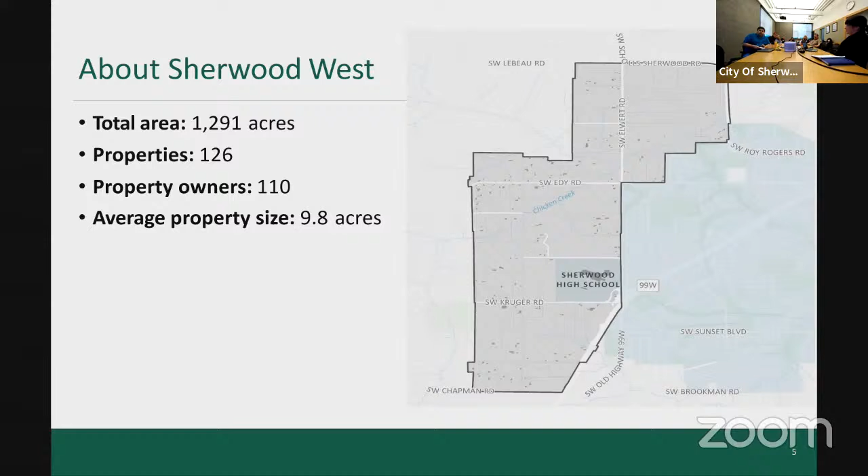So where we are at in the process: we received a grant in 2021 to do this work from Metro. We formed a Technical Advisory Committee and a Community Advisory Committee, made up of folks from within the Sherwood city boundary and also folks in Sherwood West. We just had our 8th meeting and we're headed into our 9th meeting next week. We are developing our land use scenario maps and implementation tools so we can take that out to the community for an engagement activity this summer.

We anticipate this project being wrapped up hopefully by the end of this year, 2022.

So here is the Sherwood West vision. We added some language to the vision that was in the 2016 plan. We really want to make Sherwood West a family-oriented place that's safe, where families can live, work, and play. We want to make sure the infrastructure is planned well, that the streets are well connected, with walkable neighborhoods. We've expanded our tax base here in Sherwood by providing higher wage jobs, and we want to take advantage of our network of natural trails, parks, and open space that Sherwood West provides.

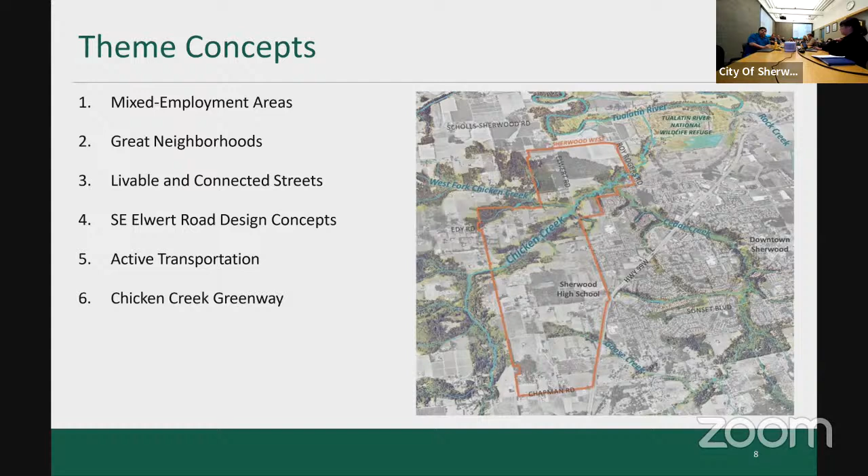So we have 6 theme concepts in this area: mixed employment, great neighborhoods, livable and connected streets. I'll talk about the Southeast Elwert road design concept, active transportation, and my favorite, the Chicken Creek Greenway. But first, let's talk about employment.

We're talking about mixed employment in Sherwood West, and we want the right kind of jobs in the right place. When we started this work, we reached out to over 30+ stakeholders who do work in economic development - folks who build office campuses, folks in the healthcare industry, and those in wine-related businesses around this area, to really get a sense of what would work. Everybody we talked to is really enthusiastic about Sherwood West and the opportunities it could provide for jobs.

And so with that, the employment uses that we're looking at are high tech jobs, clean tech, flex uses, smaller commercial, retail. We want to make sure that we have plenty of different mixes of employment in this area.

This map shows the areas we're looking at for these mixed employment areas. We have the northern area about Scholls-Sherwood Road and Roy Rogers. That area is really flat, with great opportunities for a large campus, park, or multi-tenant space, such as a tech park. Moving down south, we had a little 6-acre node, but our CAC wasn't too keen on that, so we've taken that out of the mix.

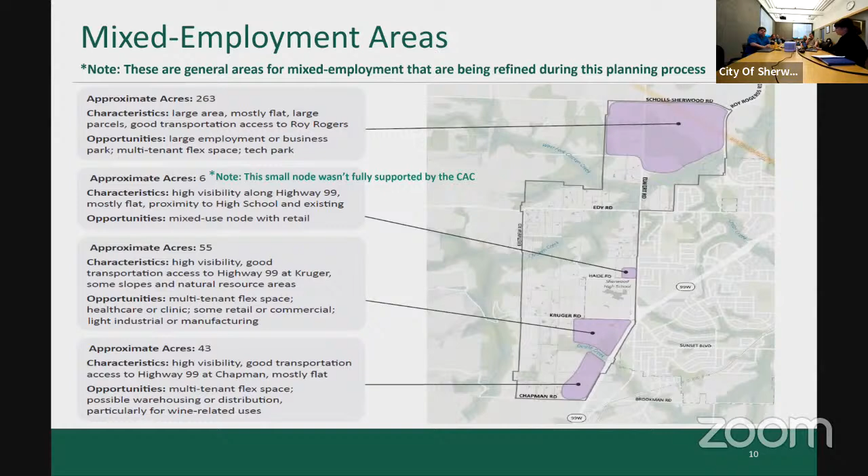So moving on to our great neighborhoods, if you have a great job in Sherwood, you want a great place to live, right? So we plan on making some great neighborhoods. We're planning for walkability. We need to provide for a variety of housing. And of course, we talk about how we need to integrate the new neighborhoods with the existing neighborhoods in Sherwood and what that will look like.

And I'm going to talk about trails here too in a minute. We want to plan for parks in these new neighborhoods and make sure that they're connected to green spaces and nature.

So when we talk about different types of housing in Sherwood West and what we should be providing: single family detached, townhomes, single family detached with ADUs. And we've talked about cottage clusters and different kinds of plexes.

Now going back all the way to the comprehensive plan work that we did a couple years back, we know that the community really desires cottage clusters and townhomes out of that missing middle span of housing. Those are the two that have bubbled up from the community as what they prefer out of those types.

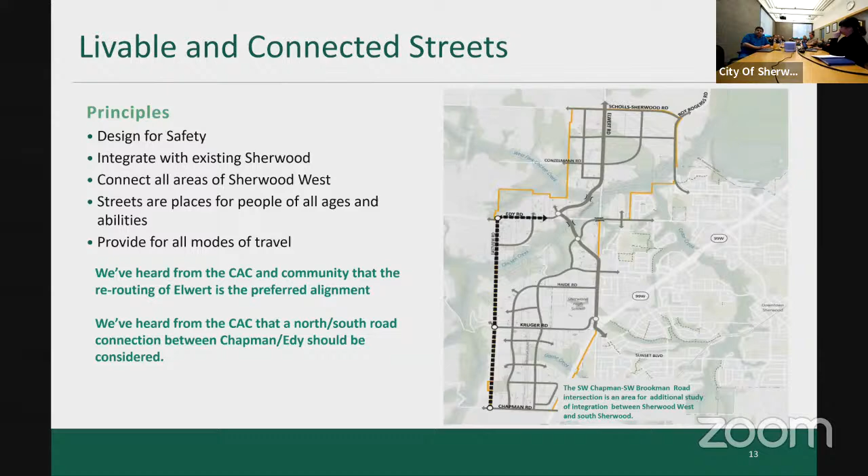The bigger the grid, the better—connections, connections, connections. I lived in a city for a while that was all traffic circles everywhere, and it was such a joy. Didn't get dizzy? No, because when you come down Elwert, sometimes that's backed up. When I used to commute that way, it'd be backed up just because everybody's doing a hard stop at the intersection. Well, even a halfway stop would cause it to back up, even if they're rolling kind of through it. So anyway, I'm all for it.

So our Southeast Elwert Road design concepts. When you think of great streets here in Sherwood, I often hear people say we want Sunset, we like Sunset, we love the design elements on Sunset. So we've taken that approach.

We're looking at how we can take those design elements along Sunset and integrate them, crossing Highway 99 up Elwert. So we are looking at increasing the tree canopy, making sure we have planted medians, a consistent fence line, making sure the multi-use path is extended all the way up Elwert for folks to walk and ride their bicycles, and just making sure it's a nice green landscaped corridor.

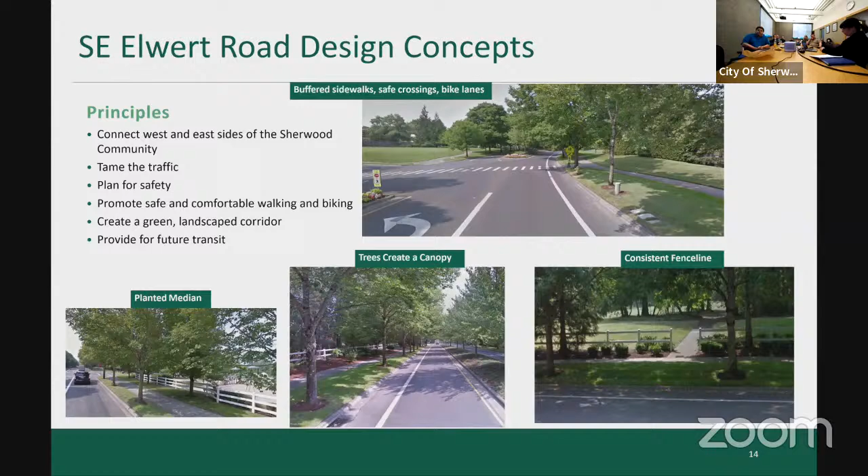So when we talk about Elwert, we want to make sure we're designing it in a way that's distinctive for the road. There will be little nodes along the way. Of course we have the high school, the edge, which is really the gateway. Then we move into kind of the residential boulevard treatment where we extend that multi-use path up along residential neighborhoods.

We have some green crossings over Chicken Creek. We want to make sure those crossings are designed in an environmental manner. Maybe we can provide some artwork and public views for those crossings.

And then in the employment area, like I was saying, we want to make sure we're limiting curb cuts, but making sure trucks have the right turning radiuses. Make sure we have a nice visual corridor along that area too, and make it a nice little employment parkway, as I like to call it.

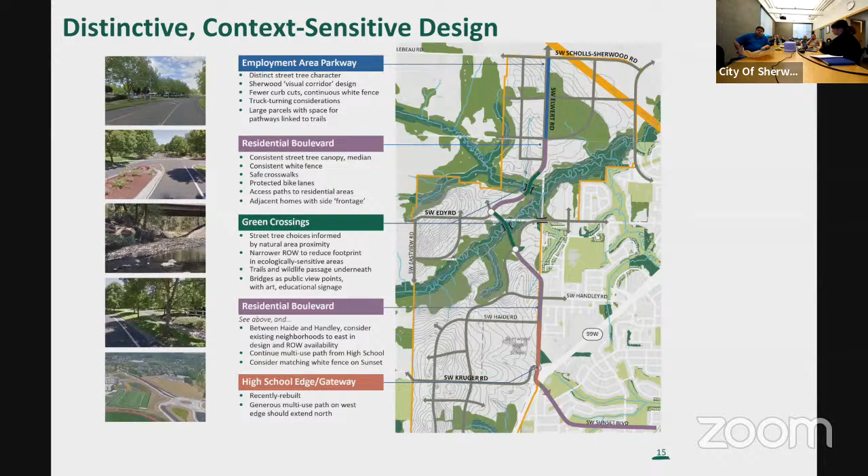So active transportation. Just imagine yourself at the YMCA. You're on your bike, you cross the new pedestrian bridge onto Elwert. I crash.

But it's safe because you're not going to get hit by a car. You cross that new pedestrian bridge, you're at the high school, you're on a new multi-use path. You take that path all the way up to the new Chicken Creek Corridor Trail. You head east on that trail all the way to the refuge. Or you can circle back to the Cedar Creek Trail. So it provides this awesome loop.

And with that, I want to move to Sherwood West. We really want to provide all modes of transportation, making sure we have key connections to really interesting places, your destinations, your schools, your parks, your employment.

Can we jump back real quick? One of the things we talked about that I really liked was, you'll notice in Chicken Creek, trails on both sides, housing on both sides. And on this map, you see all those little green spaces, so those are proposed neighborhood parks as well.

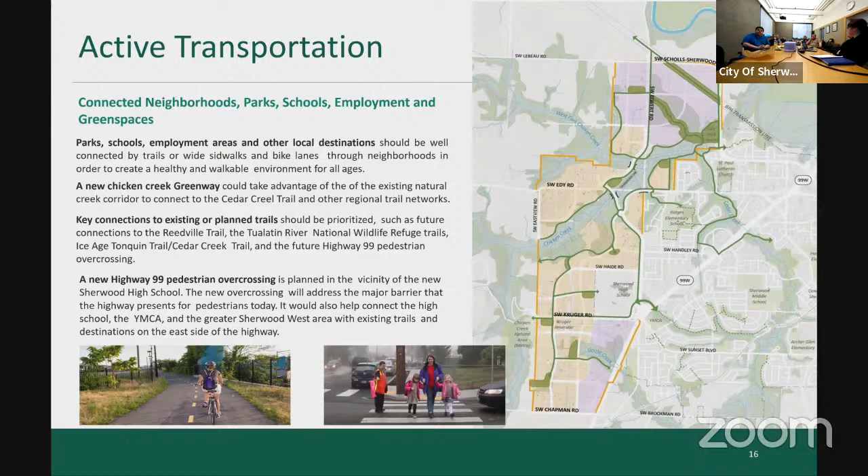So the Chicken Creek Greenway - as you know, Chicken Creek crosses through Sherwood West, and it's a green asset for the community. We're planning a trail system on both sides of the riparian corridor through there that can provide access to nature, stormwater management, multi-use paths, and it could really provide a buffer between neighborhoods.

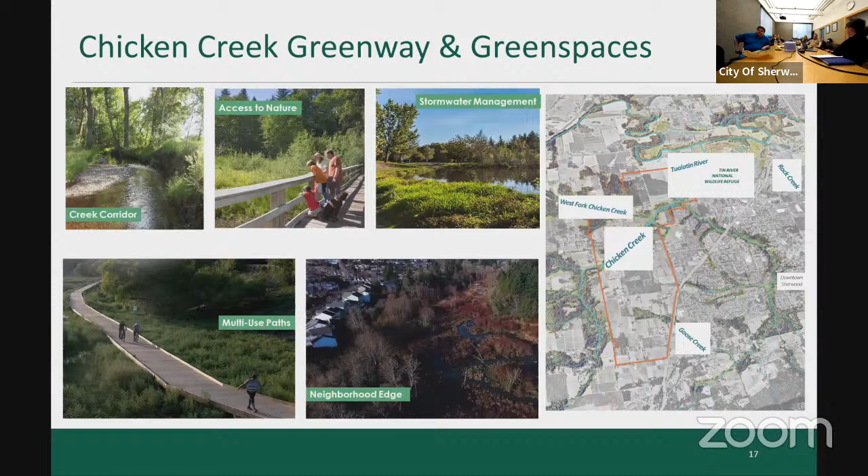I must say, I have never heard of Goose Creek. I'm embarrassed. Yes, we have a Goose Creek. I've been around a couple of years, and I've never heard of Goose Creek. All right, cool. Is there water in Goose Creek, or is it just name only? When I drive by, it looks like blackberry bushes. All right, so it's more of a seasonal thing - goes back underground. Popular with the kids, the blackberries.

So the estimate of total open space in Sherwood West right now, when you take out all of the resource lands - the riparian areas, the wetlands, the steep slopes - when we take out the areas needed for parks, and the natural gas line easement that runs through Sherwood West, we're looking at almost 40% open space.

And then I need to say it would actually be more open space, because as you develop neighborhoods, we have an open space policy that requires even more open space. So it's gonna be a nice green development. Yeah, and that's why it's always been, hey, it's not that much developable dirt out there.

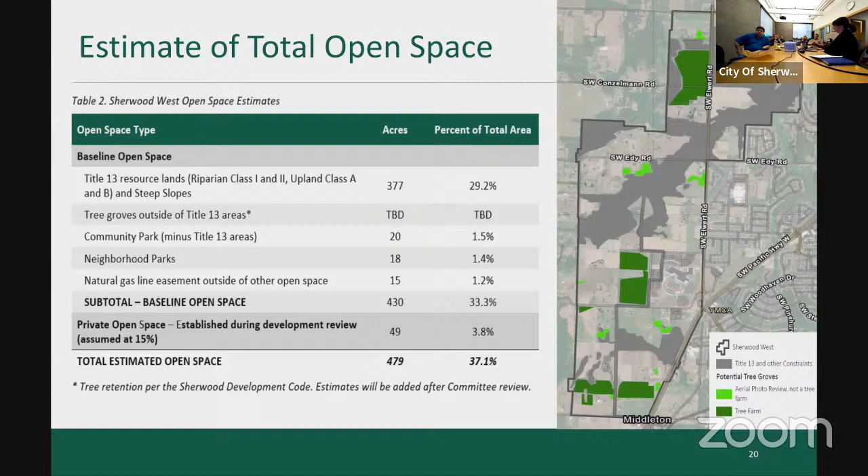So things we are keeping in the back of our minds right now at the CAC committee: we need a plan for a community park, so we're looking at potential options of where a community park could be located. And then we're also looking at where a new middle school could be located as well.

We talked to the school districts, and right now they agree that they probably have 10 years of growth in Sherwood before they would need a new school, so they have existing capacity. But they were also, when thinking about growth, thinking about everything that's already in the city limits as well. Right. Yeah, no schools, no parks in job country.

So when we talk - because it was like 175 acres of employment land? This is coming up in tomorrow's packet, but the newly updated BLI is roughly around 250 acres of employment. That's a much better number, thank you. So we've added some employment back to the mix. Much better number, good work.

I mainly just, are there gonna be lunch places right by the high school? It feels like we need - with all those students leaving lunch to go get lunch at Dutch Bros - do we just have some? There's that whole side that's on the south part of it. Okay, yeah, all right, okay. There's a target rich environment across the street. I know, I'm just making sure.

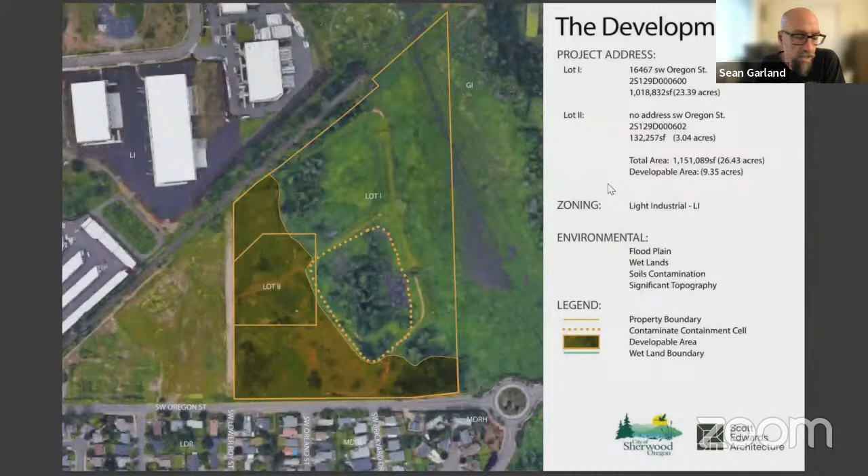Craig, that's my question for you - how many citizens do you think even come to the public works on a monthly basis? Some people probably come in to pay bills, right, but other than that, how many visitors do you think you get? Not too many visitors - before the pandemic we had meetings there, other agencies would show up. Not too many citizens. We have quite a few people that still pay their utility bill at the front counter, believe it or not.

I've been in the building a few times and it's dated, is a nice way of saying it. It was dated when we bought it. But I think there's two approaches I'm going with here - first of all, a nice new building for our Public Works is more functional, but it's also just a better look for our city. I think overall it's good to have a nice looking building.

The flip side, and maybe what Taylor was getting at, is how many people actually know what our public works building looks like. When we're messaging why we need a new building, we may have to explain that there's clearly a need for it. A lot of people won't know there might be a need for a new public works building, but the expanded yard this year is a clear indicator we have issues. People are going to ask why we need a new building, and we have to explain it in a way that doesn't disparage the building too much, but makes clear there is a need for it.

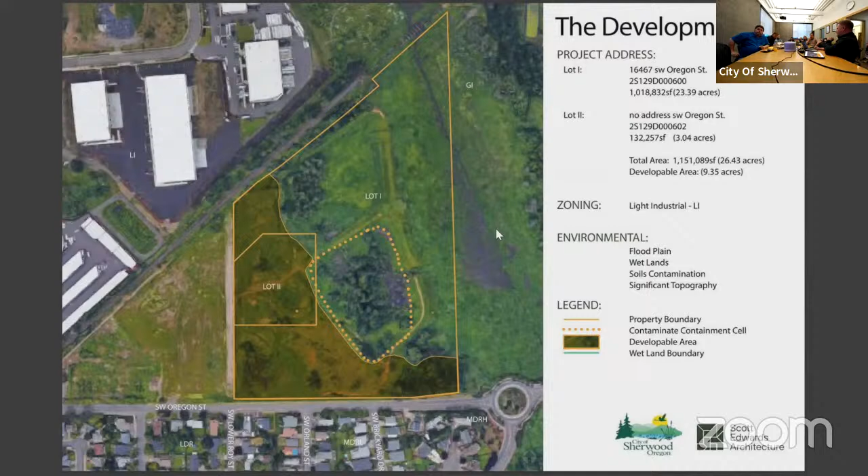So how do we approach this site, given you can only develop a certain percentage of it? It has lots of topography on it. Well, we said, one, obviously after the cleanup and it's ready for development, let's consolidate the lots, that's easy. But let's balance cut and fill. You don't want to bring a whole lot of dirt on site, and you don't want to take a whole lot away, so you want to balance that effort.

The way we're looking at doing that is actually terracing the site using significant retaining walls. These yellow squares here represent the two relatively flat areas that we would call the upper and lower yard. You'd have the upper yard presenting itself on Oregon Street, and then the lower yard taking advantage of that topography change, working down the hillside.

The lower yard, the lower level, would be your warehouse building. It's where all your fleet, large equipment parking would go, and your bulk material storage. Again, these two areas would want to be flat. This presents a 2-story office building.

This creates an opportunity for some presence on Oregon Street, while also helping minimize the impact on the neighborhood. All the noisy things, the things people aren't going to want to look at, we'll hide down the hillside. You don't really get a vantage point to the site, which I think is a huge bonus.

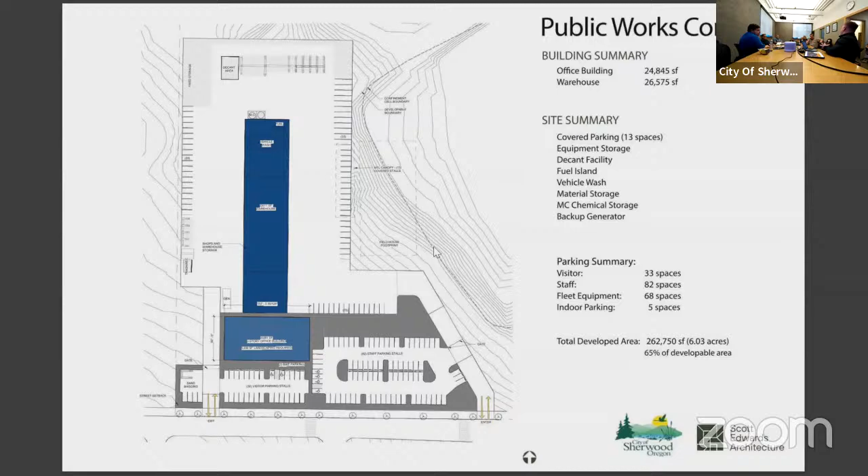Yeah, what we'd like to convey is you don't build that here with the field house and the parking lot. I would completely agree. So to give you kind of a visual, just a little bit better understanding of dealing with the topography, this drawing here really shows you, each one of these is a foot change in grade.

Yeah, it falls away. Part of our effort, we did some adjacency studies, so you can see the bar for the warehouse versus the bar for the admin building, giving scale and size to the different departments and entities that are going to be plugged into these buildings. We started showing that it does fit and how we actually see the site working.

So again, on the upper level, you have staff and visitor parking, giving you a secured ramp entrance to the lower yard, good circulation around the building, the warehouse. As a rule of thumb, you want about 80 feet off of that warehouse to allow for vehicle circulation in and out. So you can see parking around the perimeter.

The north end is really their material storage, decant facility. So you build out that warehouse, you stop it at a certain point, giving you some site area to expand it down the line. It's a pre-engineered metal building with bays, so you can add more bays down. And the chemical storage tanks aren't difficult to relocate. Not difficult, you drain them and haul them over. Correct, all above ground, that infrastructure is pretty light. So expanding it north of the warehouse, we see is doable.

This other view here, you can see how you start to relate to the neighborhood. So Oregon Street, oh yeah, good partner, yeah, it doesn't really have a good pedestrian feel to it.

The sidewalk is actually a little bit of an improvement over a tannery or a battery recycler. There's no reason why you can't do a facility for public works that presents itself well and still be able to justify the cost, be good stewards of public works. Easy.

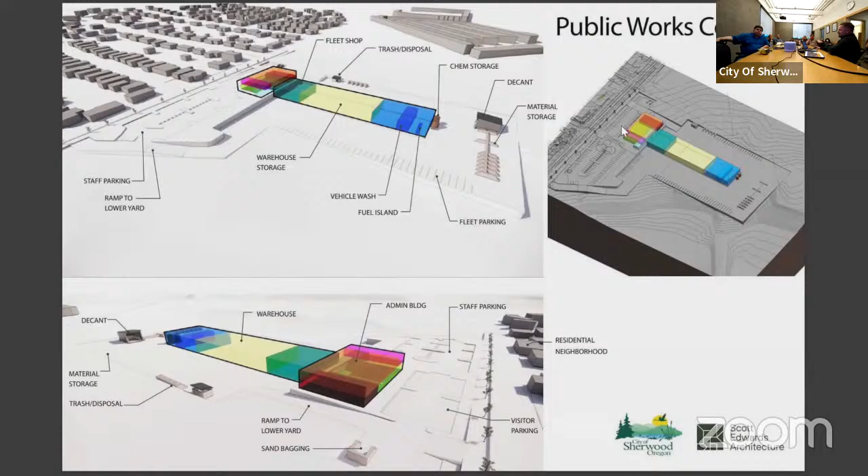We further explored, so once we got the yard settled, we said, well, we know how much of a perimeter, we know where we want these retaining walls. So if you can imagine in your mind, the site layout applies to all 4 options. So really the options presented here is how do you site the admin building?

Right? Do you have them connected so you have some efficiency with circulation? Do you have them separated and separate the parking so that you have street presence? Do you turn your back on the street, focus on the green space, or solely focus on that?

By combining it with option A, don't you save a bunch of money with core facilities, bathrooms? Yeah. We don't need to double the toilets in 2 buildings. No, the circulation between the two, again, everybody's starting one day, so the less they have to move between buildings, just efficiency of circulation.

So that makes sense. Would the first floor of the admin building be at the rear lot level? No, it would be at the street level, right? So if you can imagine, I'm a visitor, I drive into the visitor lot, I wanna walk into the lobby, be adjacent to the reception area, be adjacent to the building.

I understand the lobby concept, but what I'm saying is there's 2 stories, so is there a basement under there you'd take advantage of? To get the 2 stories, so from the street? No, excuse me, you would build 2 stories up from street level and then have that basement level, right? So it's really 3 stories, yeah.

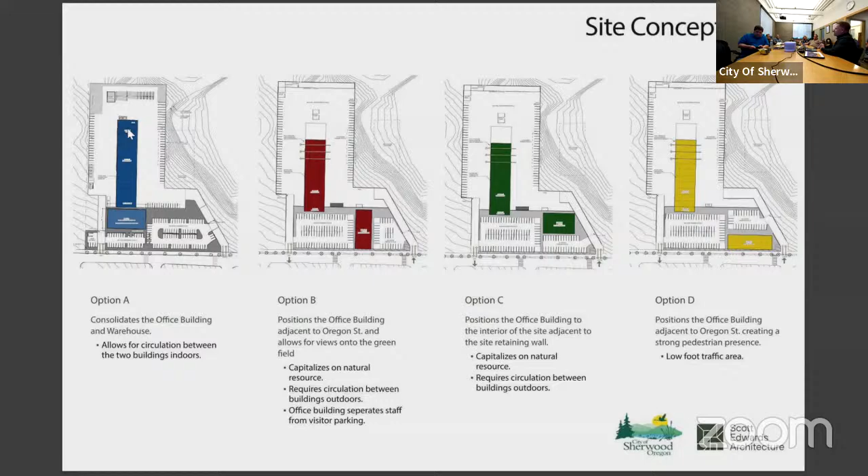Okay, that's great. So here's the rub. Total project cost, we're looking at anywhere in the realm of $25 to $26 million, plus the cost of the land. So the three buckets of money I want you to really think about is the property purchase, your construction cost, and then your soft cost.

So question, maybe I was misinformed, but my understanding is we could get the land for free as long as we take on the cleanup. I wasn't part of those conversations at the beginning, and my understanding is there's been some change at the county, and they're talking about putting some stuff up for auction.

So what we actually need to do, I laid out in the email, we need to get a prospective purchase agreement with DEQ before we even really start to have a conversation about buying the property. We can have the conversation, but you need that agreement before we actually purchase the property, even if it's for $1 or whatever it is.

I have not had the conversation with the county. Julia's been working on this, or she has in the past, so I don't know any agreements. I know it was cheap, but we also had some changes in their property management. My understanding is they had some rules around maybe an ordinance, I don't know what it is, but they have to make it available for public. We'll sort it out, and that's what I put in the email.

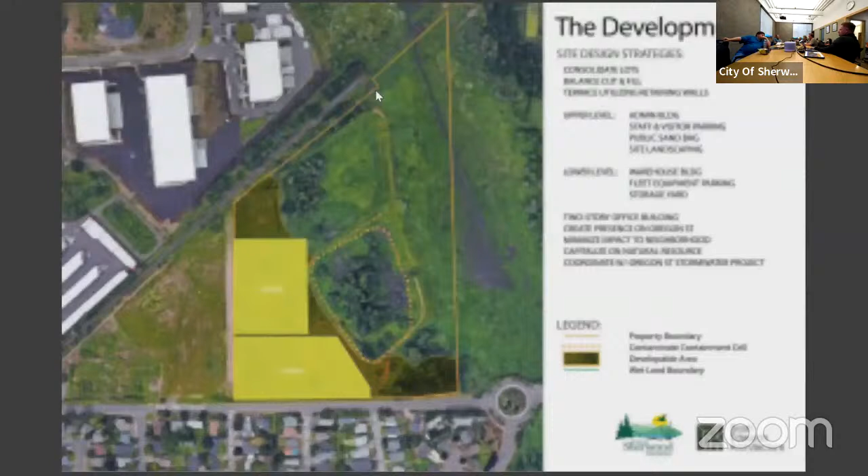What I'd like to do is wrap this feasibility study up, put some final numbers in there once we get the cost in from Wilsonville, so we have accurate numbers. Then starting in the next budget year, have that conversation and start moving towards the 30%, start to get a PPA together, the DEQ, meet with the county, and start working a plan out with the new people there for purchasing the property, however that's going to be.

So we understand that, as well as the Brownfield side. That's a little bit in the email. I didn't go into costs and the time frame, but it'd be nice to continue the Oregon Street project. This all kind of aligns, though we might have to build the water quality facility there on the Oregon Street project a little sooner than the actual project to make this all work, along with the land use, surveying, and everything that needs to be done. That's in the email I sent today, just not a timeline on that, but I'm more than happy to put a timeline together for you too.

Great. Any other questions for Brandon? If anyone's interested in looking at Oregon City or Wilsonville, I'm more than willing to take you or share that with you.

There's been a lot of work put into this, even before I joined the meetings, a lot before that. It was interesting sitting in the meetings and having all your leads there - the supervisors from each section, as well as our emergency management coordinator, and somebody from the billing side for setting up more of the outreach as we move forward. There was a team put together for the every-2-weeks meeting, and a smaller group that worked on the details. They were all providing input - I remember the one about the fuel station, asking can we move it here so trucks go on both sides. Just lots of really good input from the people who use those stations every day. They might seem like a quiet group, but you've got a lot of input in this facility - this wasn't just one or two people doing it.